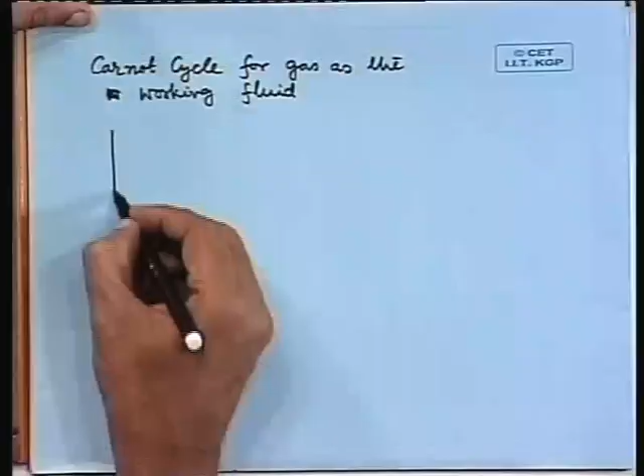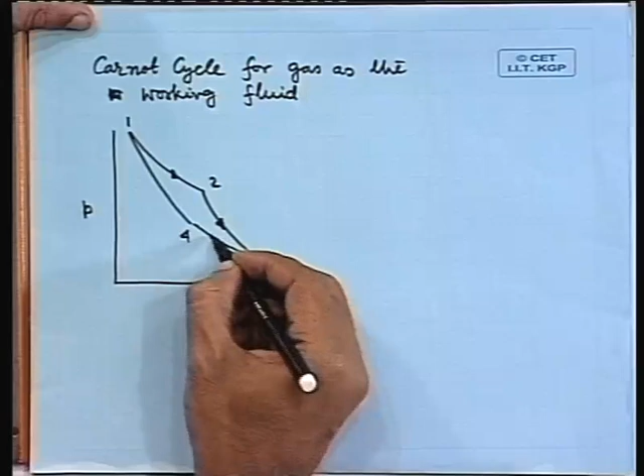So we will have this, the PV diagram of a Carnot cycle. One, two, three, four. A cycle like this: isothermal, adiabatic, isothermal, adiabatic.

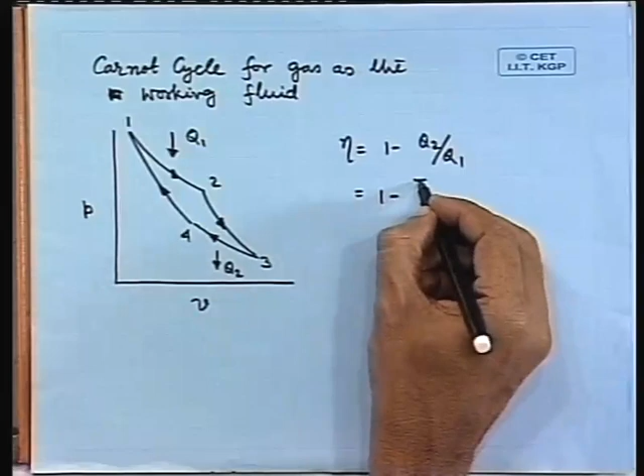Here we have got Q in, here we have got Q out, and out of the cycle we will have efficiency eta is equal to 1 minus Q2 by Q1. So this will be 1 minus T2 by T1, and that is the maximum possible when these two temperatures T2 and T1 are specified. But the problem is that...

For gas as a working fluid, isothermal heat addition and isothermal heat rejection are almost impossible, unless we have a very large engine with a very large surface area and an infinitesimally slow process. One may try to approach isothermal heating and isothermal cooling, one will not get exactly, but one may approach it.

Again, for the adiabatic processes, we have to have fast processes. So what we are having is that for part of the cycle we are having a very slow process, we need lower surface area... higher surface area for better heat transfer, and for part of the process we need to have very low surface area and high speed. So it is difficult to design such a cycle, it is not practicable.

Another thing: the change in volume, total change in volume for the cycle is V3 minus V1. This is V3 and this is V1, so that is the total change in volume. If we think of it in terms of the engine, this is nothing but the swept volume. This swept volume becomes very large compared to...

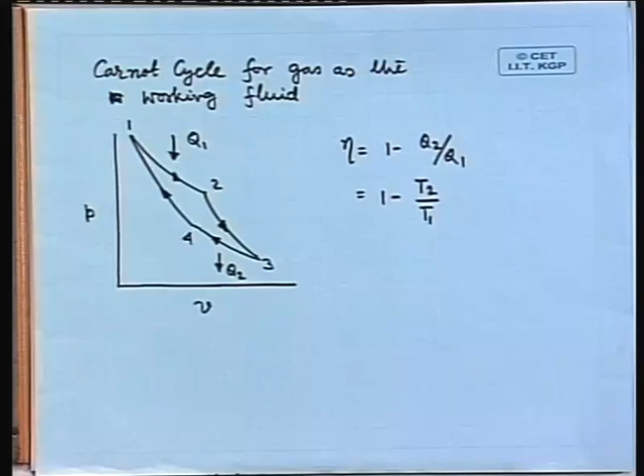the total work done. What does it mean? It means that the mean effective pressure, MEP, is very low for the Carnot cycle. So swept volume large means very large engine, very large volume, but we are having a very small amount of work output, so our MEP becomes very small. Now this is only representative of the ideal process.

In actual case, what will happen? There will be friction. So when we are having a low MEP without considering friction, when we consider friction, we will get very minimum output out of the cycle. So cycle design is not possible, not practicable. Even if somebody designs the cycle, friction etc. cannot be eliminated, and we will get very low output from the cycle. So though thermodynamically the efficiency is very high, practically the efficiency will be low, and practically this cycle we cannot develop either. That is why, with gas as the working fluid, one cannot have a Carnot cycle designed.

So one has to look for other types of thermodynamic cycles. Now we know that internal combustion engines are very versatile equipment, very useful equipment, and in those equipment the combustion takes place inside the engine itself, and the hot products of combustion push the piston, and we can get work output out of it. So let us have some small idea regarding the working of internal combustion engine.

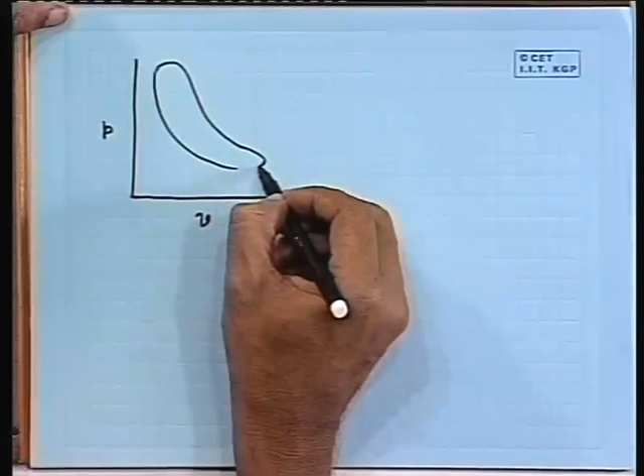If we see the PV process of internal combustion engine, an actual internal combustion engine will be something like this. This is PA, or atmospheric pressure.

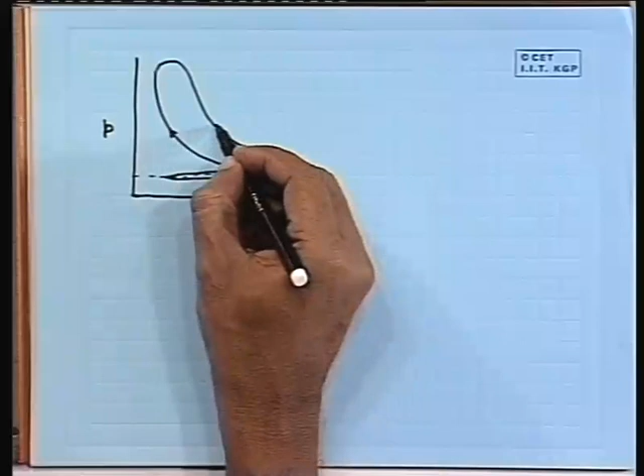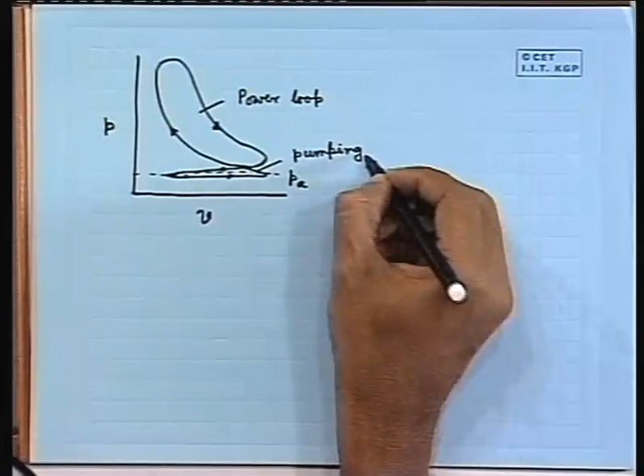So there are basically two loops: one is called the power loop and another is called the pumping loop. So one can explain the process in terms of...

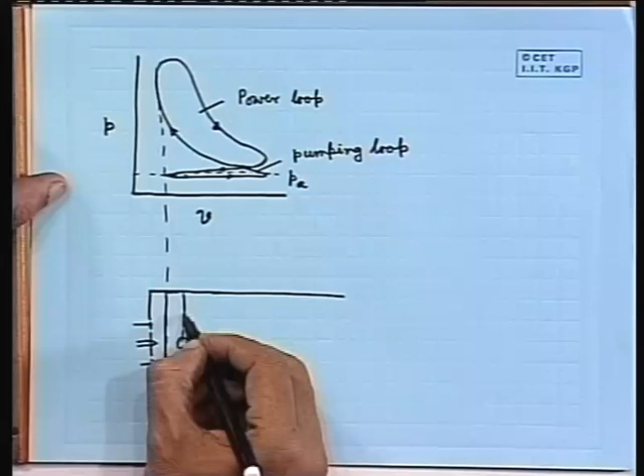So basically what I have shown is the piston-cylinder arrangement. This is the cylinder, this is the piston, and these two are the two extreme positions of the piston. This is called the outer dead center of the piston, and this is the inner dead center of the piston. So the piston has a reciprocating motion between these two dead centers, the inner dead center and the outer dead center.

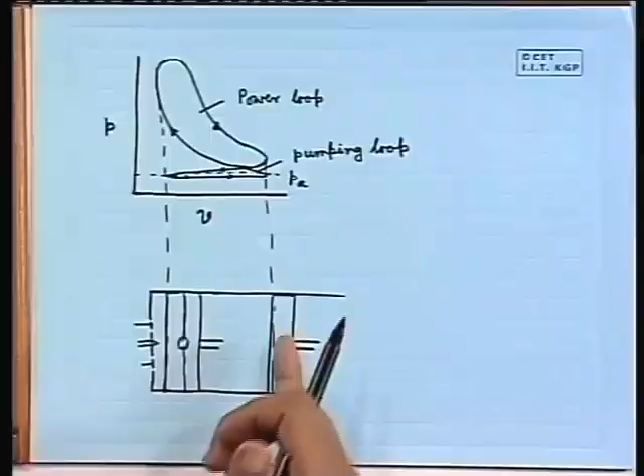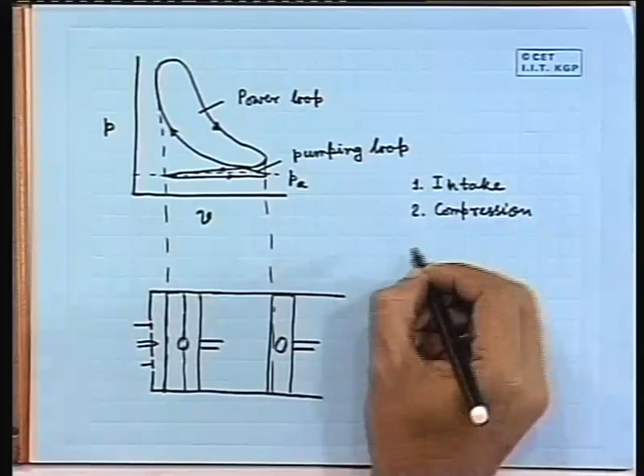Now basically there are four processes. If we consider, of course there are two types of machines, but if we consider the general working process, then there are four processes. So the four processes will be: intake, then compression, then expansion, and then exhaust.

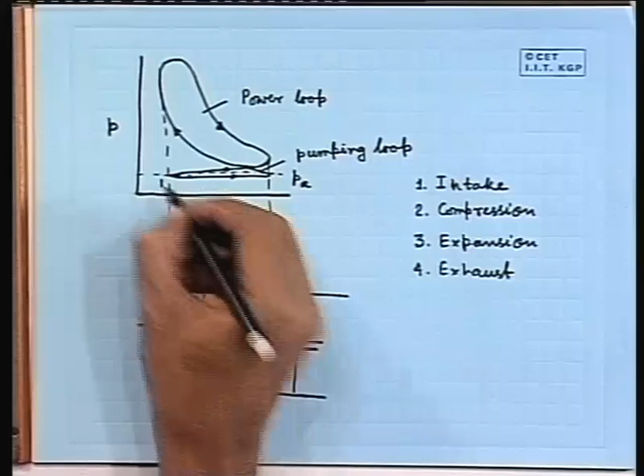So these are the 4 processes which we will have. Basically, if we see the 4 processes in this PV diagram, one can have 1 to 2, then 2 to 3, then 3 to 4, and exhaust 4 to 1.

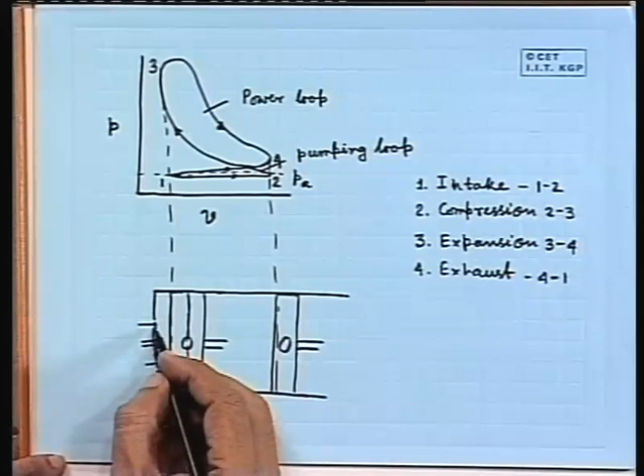So in the intake process, what happens? In this piston cylinder arrangement, there are 2 valves. One of them is the inlet valve and another is the exhaust valve.

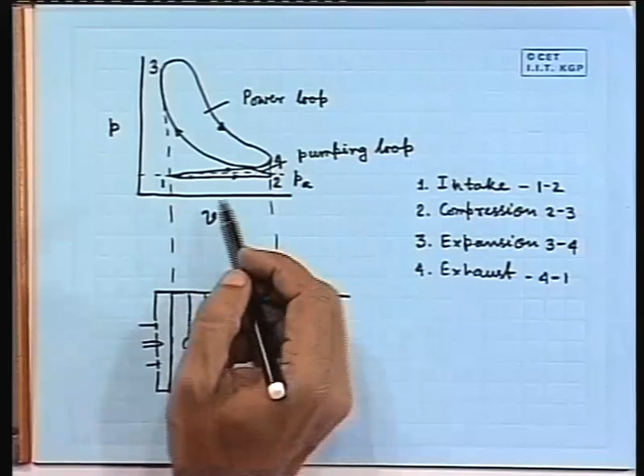So in the intake process, what happens? The piston moves from the inner dead center towards the outer dead center, reducing the pressure inside. The pressure falls below the atmospheric pressure, shown here. So during process 1 to 2, the pressure falls below atmospheric pressure, and air, or air fuel mixture, is sucked in inside the engine cylinder.

Then both the inlet valve and exhaust valve are closed. The piston has an inward movement from outer dead center to inner dead center. At that time, either the sucked air or the sucked air fuel mixture is compressed. That is the compression process.

Towards the end of the compression process, if we have sucked air fuel vapor mixture, then an ignition is created with the help of a spark plug, symbolically shown here. Or towards the end of compression of air, we inject fuel, liquid fuel, in the form of fine spray, so that the fuel air mixture gets further compressed and evaporated and ignition takes place.

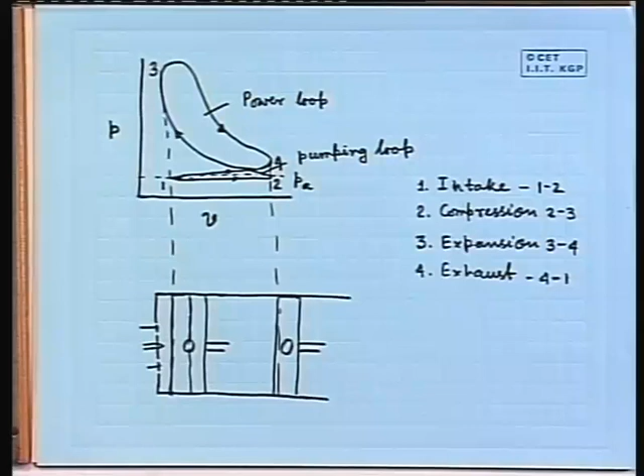So this gas has to be expelled out of the engine so that fresh charge can be taken again and the cycle can restart. The piston moves from outer dead center to inner dead center while the exhaust valve is open, so the gas pressure rises above atmospheric pressure and the spent gas goes out of the engine.

So this is what we have in a nutshell in an internal combustion engine. Now the process is complex. So we generally, when we do the thermodynamic analysis, do a certain amount of idealization. The idealized cycle, we call it—

Air standard cycle. The idealized cycle is called the air standard cycle. I can represent any air standard cycle here. It is assumed that both the suction and exhaust processes, or intake and exhaust, take place at atmospheric pressure.

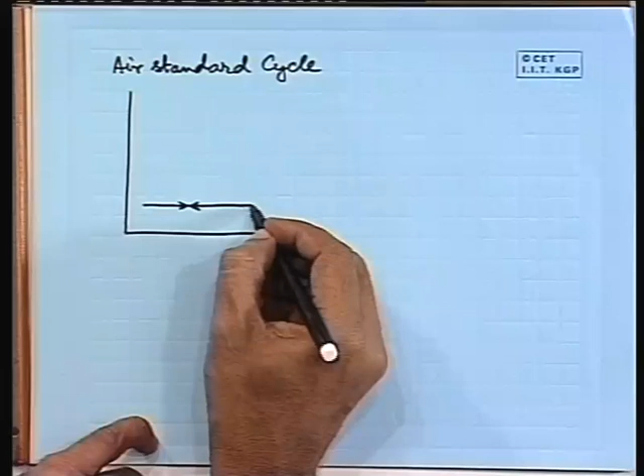So instead of this loop, we will have a straight line. Instead of this loop, we will have this straight line. So it is pointless to carry this thing along with the cycle diagram, so we can do away with this straight line also. Let us say this is one representation of an ideal cycle.

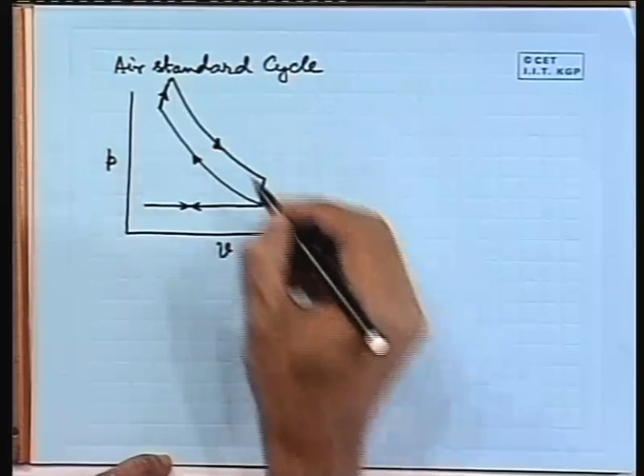Abolition of the suction and exhaust process is one attribute of the air standard cycle. Then we assume that air, and only air, is the working substance inside, meaning it does not change its chemical property or chemical composition during the process.

So the combustion process which takes place inside the engine is replaced by some sort of reversible heat addition process, in which heat is added from some external agency. And again, we have got some sort of a reversible heat rejection process.

Moreover, one assumes that the specific heats remain constant during the process, there is no change of specific heat. Actually, though there will be a large amount of change of pressure and temperature, we assume that the specific heat does not change.

So, this is what is the air standard cycle, because we want to first idealize the cycle and then we can see what is the performance of the idealized cycle vis-a-vis the actual cycle. So one can have the air standard cycle instead of the actual cycle for the thermodynamic analysis.

Now, we know that basically internal combustion engines are of two types, SI engine and CI engine. For SI engine or for petrol engine, the idealized cycle is known as the air standard Otto cycle.

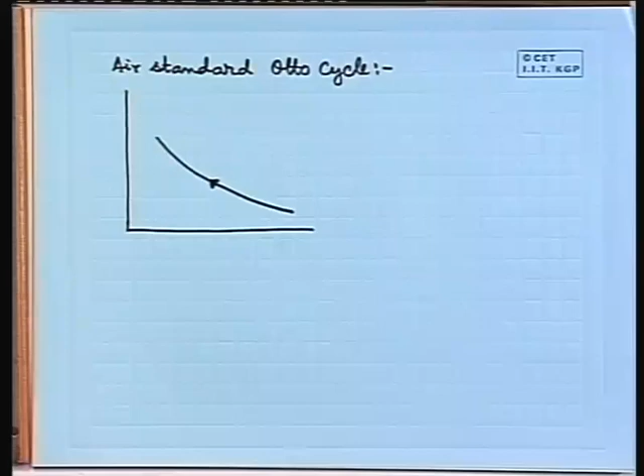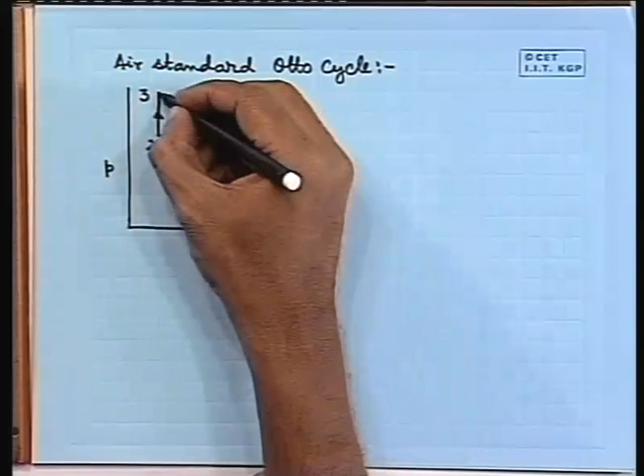Air standard Otto cycle. In the air standard Otto cycle, we will have adiabatic compression of air from 1 to 2, then, this is actually V and this is P, constant volume heat addition from 2 to 3, then adiabatic expansion from 3 to 4, and then constant volume heat rejection from 4 to 1.

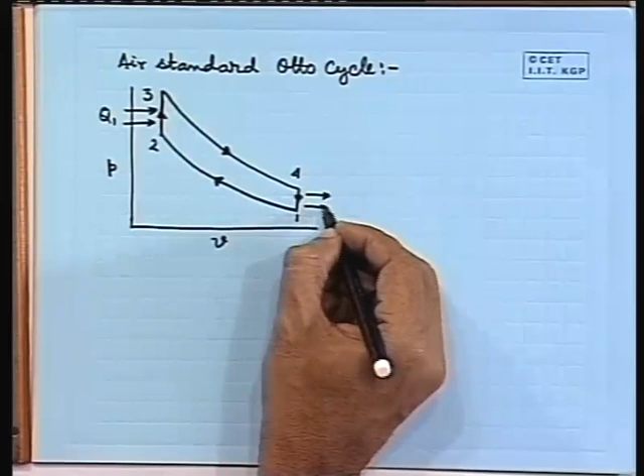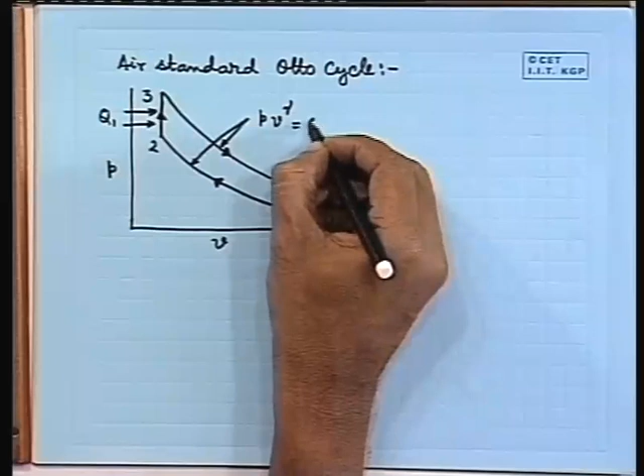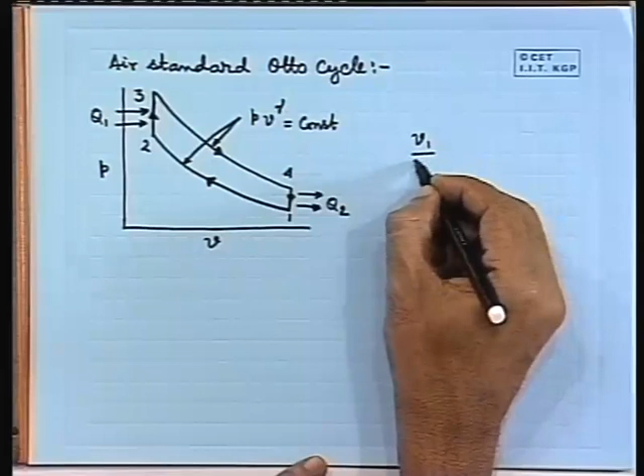These two are adiabatic processes, PV to the power gamma is equal to constant. So we will have this, and there is one important parameter, compression ratio. So we will have V1 by V2, that is the compression ratio.

What one can relate this thing to is the engine parameters. V1 is the volume inside the cylinder and V2 is the clearance volume. So by this one will get the compression ratio, and I like to represent it with R. R is the compression ratio.

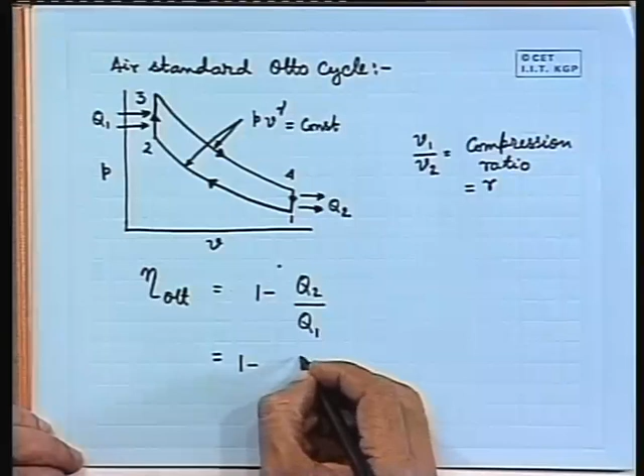Then efficiency Otto is equal to, what one can write is, 1 minus Q2 by Q1. So one can write 1 minus CV(T4 minus T1) divided by CV(T3 minus T2). So this is what we can write.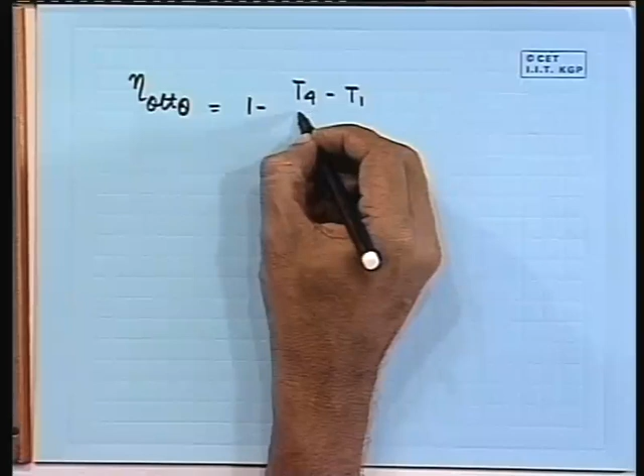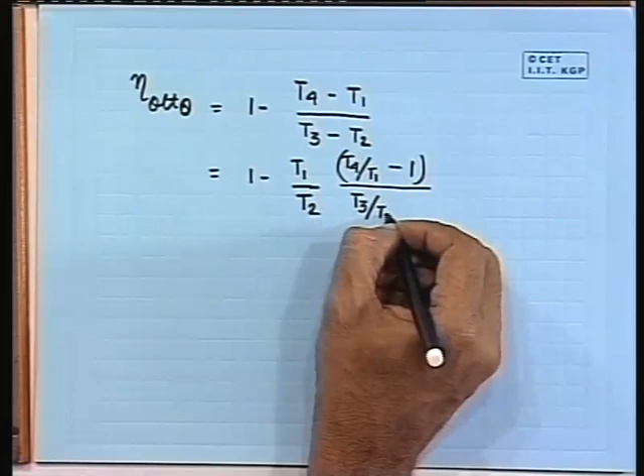So basically eta Otto is equal to 1 minus (T4 minus T1) divided by (T3 minus T2). So one can write 1 minus, well, T1 by T2. Here one can write (T4 by T1 minus 1) and (T3 by T2 minus 1). This is what we can write.

Now one has to find out the relationship between different temperatures. Actually, if we look into the cycle, there are 4 nodes: 1, 2, 3, 4, and the relationship between these 4 nodal points, 4 strategic points, is important, and that one can find out very easily. Actually, what one has to use is the ideal gas law, because we are analyzing the air standard cycle where air is assumed to be an ideal gas.

So one can use PV is equal to RT. So that relationship is there, PV is equal to RT, and then for 2 paths, that means PV to the power gamma is equal to constant for 1,2 and 3,4. These two paths, PV to the power gamma is equal to constant. So these two conditions we can use and we can determine the relationship between different temperatures.

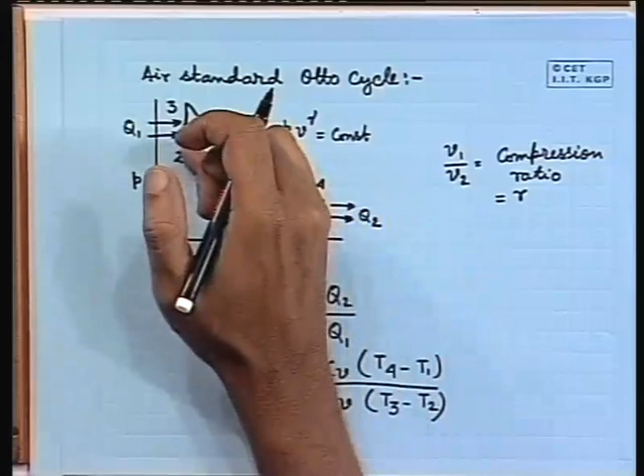All right, so now what one can write is T2 by T1. Basically one can start from this point, basically one can start from point 1. Why? Because here this is the intake point and generally this point is taken equal to the atmospheric condition. All right, so one can start from here and one can move along the cycle. So T2 by T1 is equal to (V1 by V2) to the power gamma minus 1.

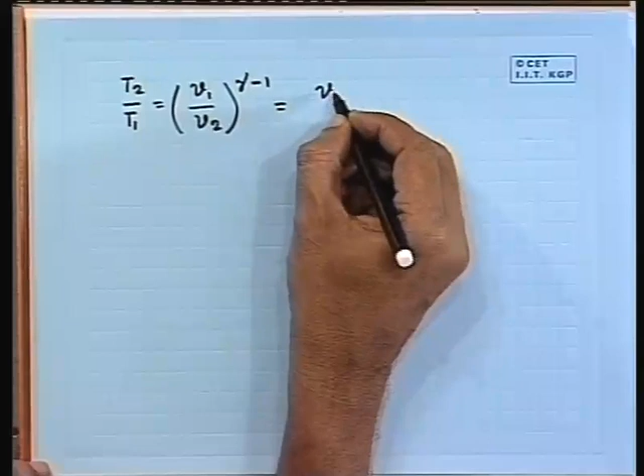So it is equal to (V4 by V3) to the power gamma minus 1. So it is equal to T3 by T4, is equal to R to the power gamma minus 1. V1 by V2 I have defined as compression ratio or R. So what we get is: T2 by T1 is equal to T3 by T4, or T4 by T1 is equal to T3 by T2.

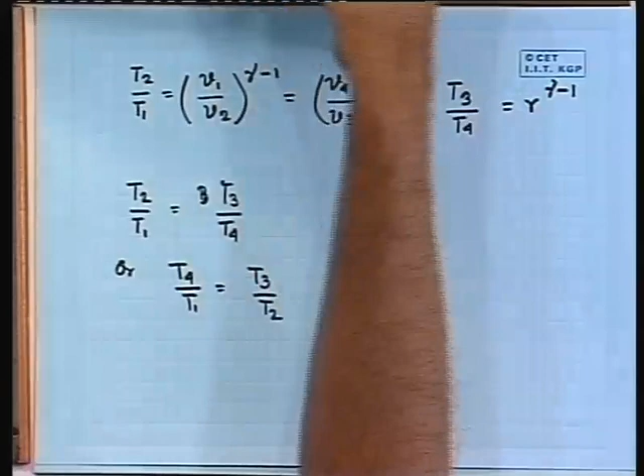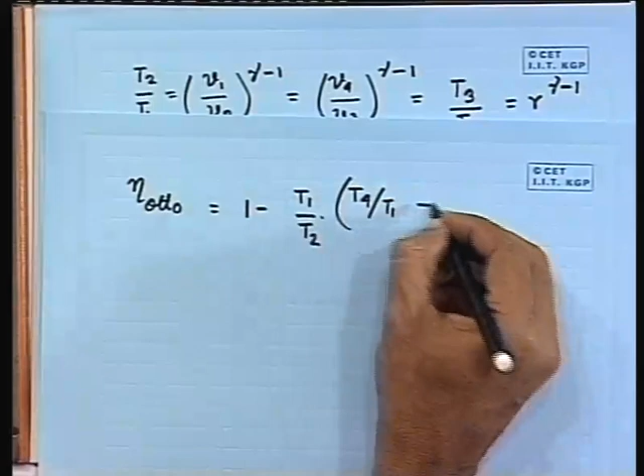So now I will write down, forget about it, I will start from this point. Let us say eta Otto is equal to 1 minus [T1 by T2 into (T4 by T1 minus 1)] divided by (T3 by T2 minus 1). So these two quantities are same, so it can be cancelled, and then one can write it is 1 minus 1 by R to the power gamma minus 1.

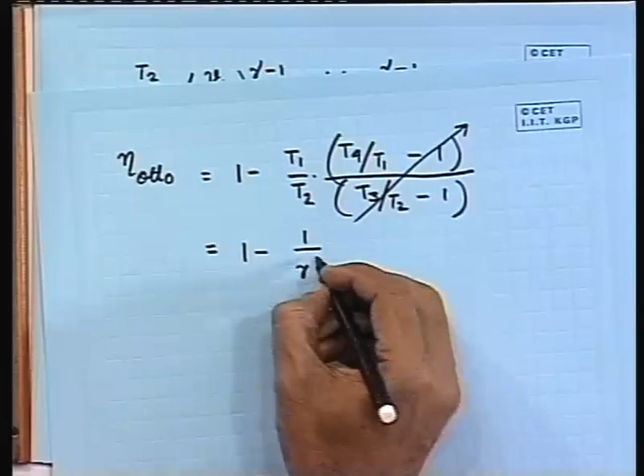So this is what we can get from our thermodynamic analysis of the cycle, and R is the compression ratio. R is the compression ratio. All right, so for ideal analysis of the ideal cycle, one can take gamma to be 1.4. In other cases, one can take different values of gamma, but for the ideal cycle, one can take gamma equal to 1.4.

What one can see is that the efficiency of the Otto cycle can be increased by increasing R. Gamma we do not have much control over, it is a property of the gas or the working fluid, and for the working fluid we do not have infinite independence in selecting a working fluid. But R, probably we can do something, we can select higher values of compression ratio.

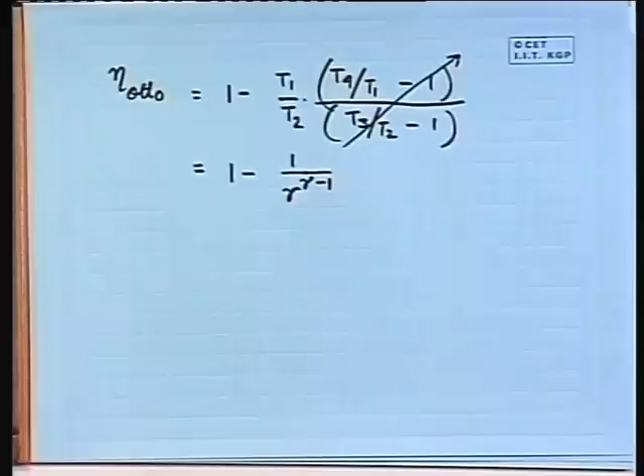Now, the problem with selecting higher values of compression ratio with the conventional design and conventional fuel of the internal combustion engine is that before you produce the spark, auto ignition will take place. It will ignite automatically before you produce the spark, and that gives uncontrolled combustion, which is not desirable. So that is why we have a limitation on the value of R, and for petrol engine or SI engine the compression ratio is generally small compared to its counterpart, the diesel engine. So we will have a lower value of compression ratio.

Now we go for the other type of arrangement. The Otto cycle is suitable for SI engine, spark ignition engine, where when the air is being sucked in, the fuel is sprayed into the airstream. That means before the air comes into the engine, with the help of a carburetor, the fuel evaporates in the airstream. So a fuel vapor mixture is formed, and that mixture then enters the engine. So that is one way of having the internal combustion engine.

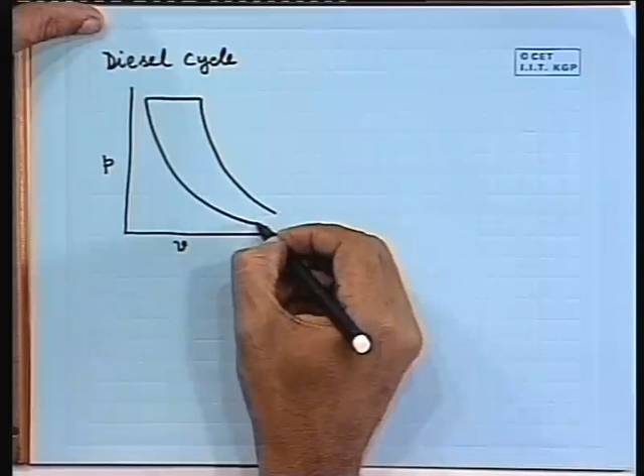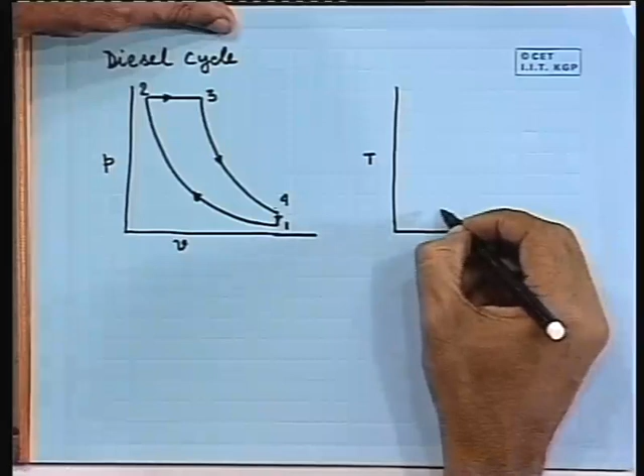The PV diagram of the diesel cycle will be something like this. This is the PV diagram of the diesel cycle. We can have side by side the TS diagram also. So 1 to 2 is the adiabatic process, 2 to 3 there will be rise in temperature, 3 is the highest point, and like this 1, 2, 3, 4.

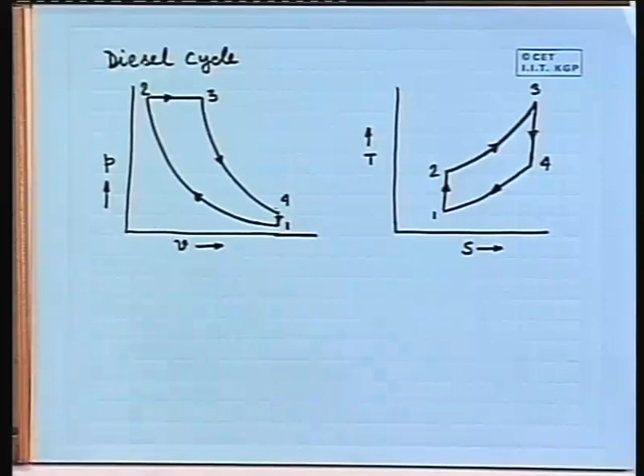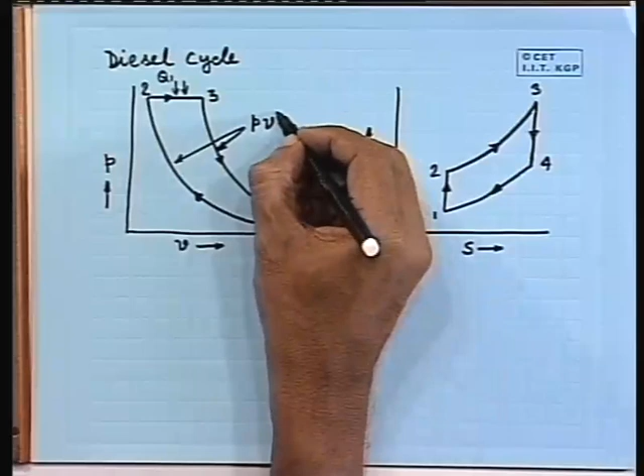So this is Q1, this is Q2, and well, these two are PV to the power gamma equal to constant.

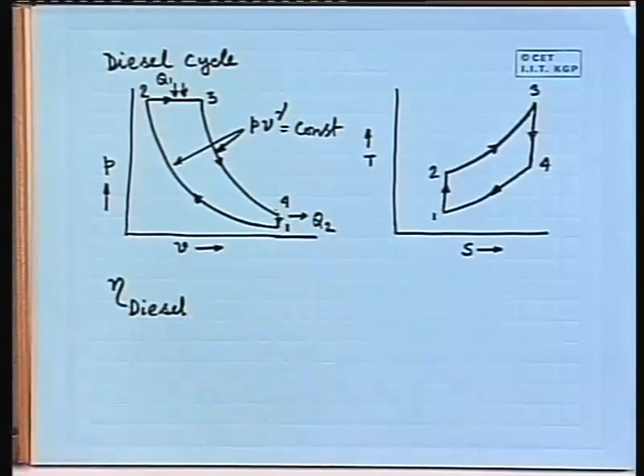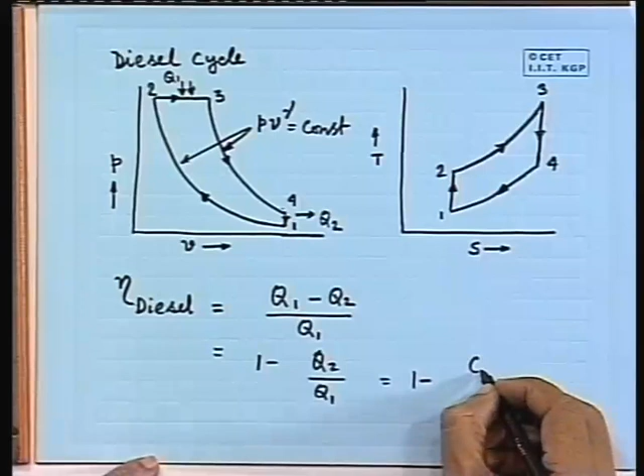So the efficiency of diesel cycle, that will be Q1 minus Q2 divided by Q1, work done divided by the energy supplied. So this will be how much? This will be 1 minus Q2 by Q1. So this is 1 minus Q2, that is the constant volume heat rejection process, Cv times T4 minus T1, divided by Cp, constant pressure heat addition, T3 minus T2.

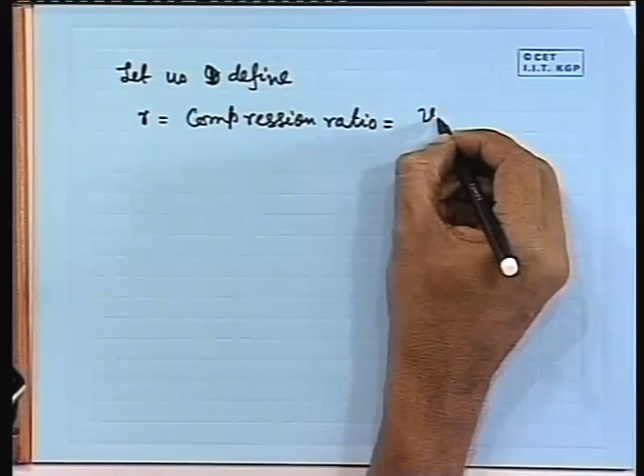At this point we want to define a few quantities. Let us define R as compression ratio, equal to V1 by V2. Where V1 is the total volume of the engine and V2 is the clearance volume. Already we have seen this in Otto cycle, it is the same quantity.

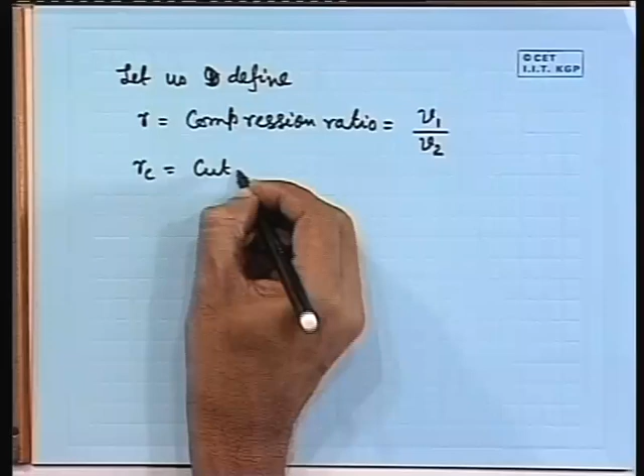And then we have got cutoff ratio, Rc, that is cutoff ratio, we call it V3 by V2. Physically it means that at point 3 the fuel supply is cut off. We start supplying the fuel at point 2, and at point 3 the fuel supply is cut off. So this is your cutoff ratio.

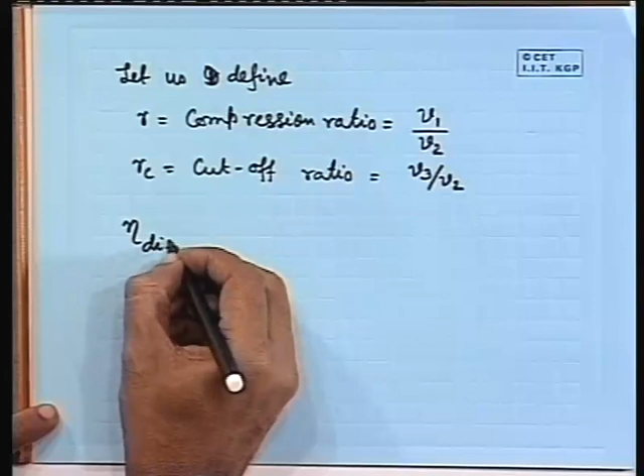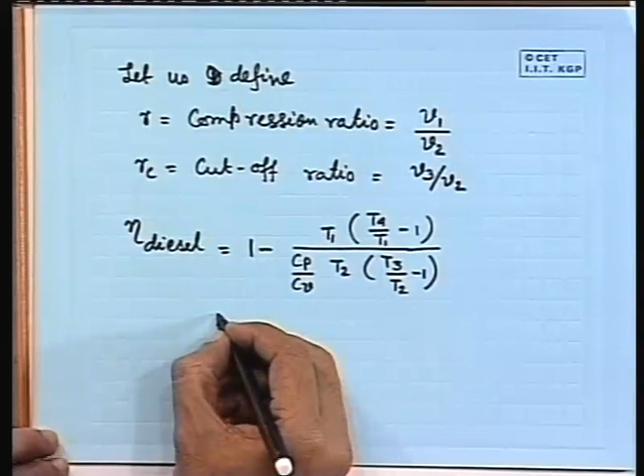Now, I will not go into detail derivation. Basically what one has to do here is get the relationship between different temperatures. I can do it slightly ahead and then leave it to you. Eta diesel, that is 1 minus Cp by Cv, one can write, and then one can have T1 here, then T4 by T1 minus 1, and one can have T2 here, then T3 by T2 minus 1. So basically we have 1 minus 1 by gamma into T1 by T2 into T4 by T1 minus 1 and T3 by T2 minus 1.

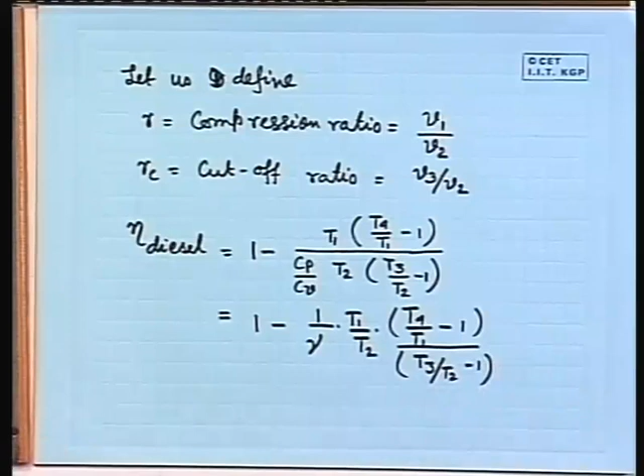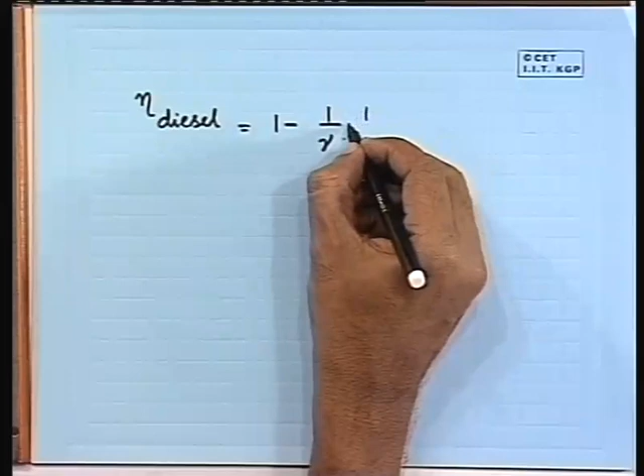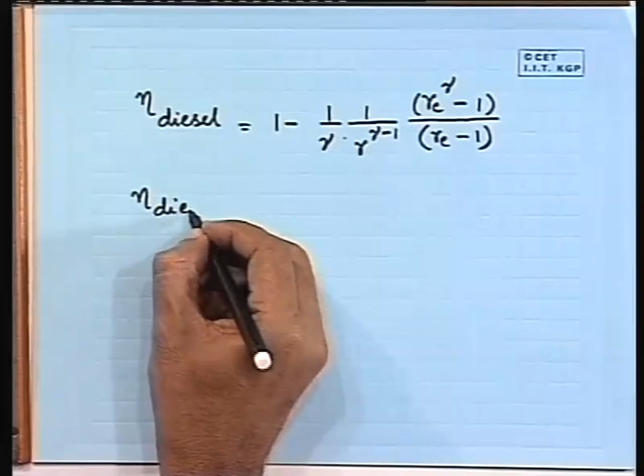Well, now just by the method we have followed earlier, one can do the analysis, and if we do the analysis, we will have a much cleaner expression. Eta diesel will be 1 minus 1 by gamma times, 1 by r to the power gamma minus 1, then on top rc to the power gamma minus 1, you will get this, and here you will have rc minus 1. So this will be the formula. So basically again, eta diesel will be a function of gamma, then r and rc.

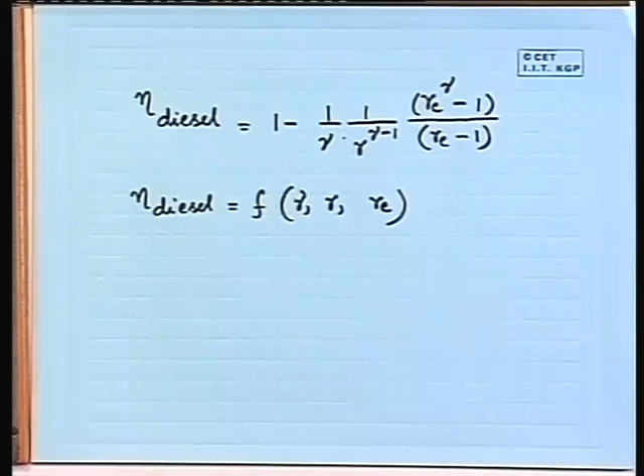Well, here of course we do not have much restriction on r, we can increase r. In fact, in CI engines we have high compression ratio. Only problem is, the more the compression ratio, the more bulky the engine becomes. Engine weight will become larger and larger to withstand the pressure fluctuation. One side we have low pressure, almost near atmospheric, and other side we have much higher pressure. So the engine will be bulkier. Again there are practical limits, so we cannot go beyond a certain value of R.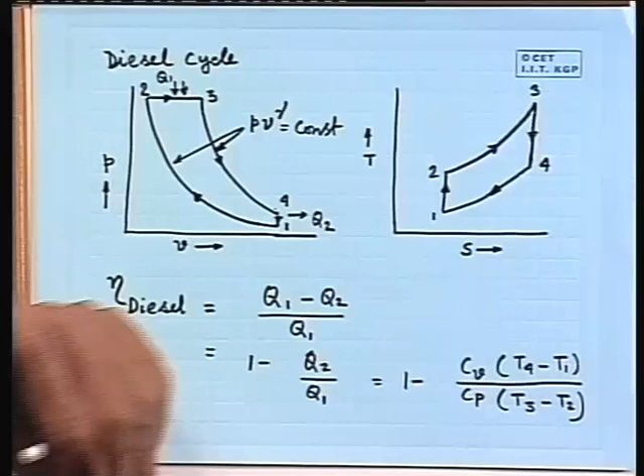RC also one should restrict. Let us say this is the engine cycle diagram. If we have lower RC, then enough amount of fuel cannot be injected. If you have higher RC, then we are not getting a large amount of work due to the expansion. So one has to compromise between these two.

So the diesel cycle, or diesel engine, will have the efficiency in terms of these quantities.

We have idealized the combustion process by two different reversible processes. First, we thought the combustion process can be represented by a constant volume heat addition process. Next, we idealized that combustion can be represented as a constant pressure heat addition process. In fact, the combustion process is so complex that it cannot be idealized either by constant volume or constant pressure process alone. What has been seen is that at the initial stage of combustion there is a very quick increase in pressure while volume remains almost constant, and after that pressure remains more or less constant while volume increases. So people thought a better representation would combine both constant volume and constant pressure processes. This cycle is known as the mixed pressure cycle or dual cycle.

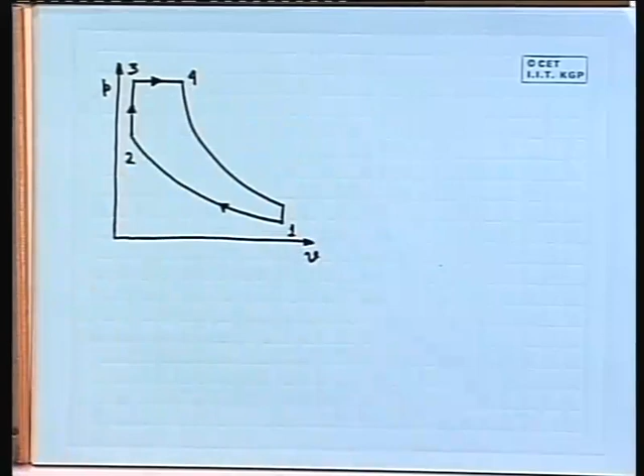So dual combustion cycle, or mixed combustion cycle, or mixed pressure cycle — there are different names for the cycle I am going to describe. Ideally the cycle looks something like this, on a pressure-volume diagram. We start from state 1. So 1 to 2 is the compression process, 2 to 3 is constant volume heat addition, 3 to 4 is constant pressure heat addition, 4 to 5 is adiabatic expansion, and 5 to 1 is the heat rejection process which takes place at constant volume.

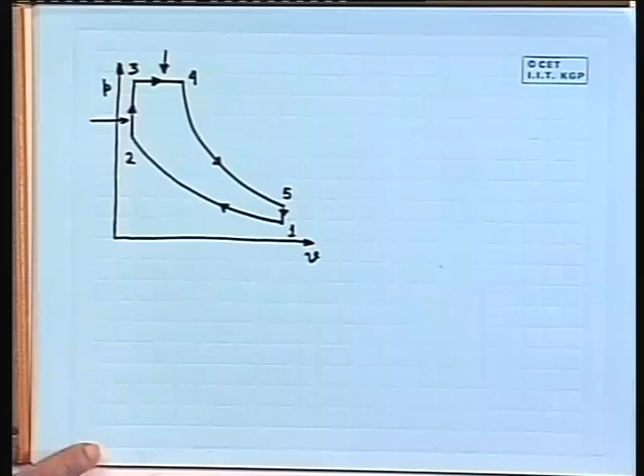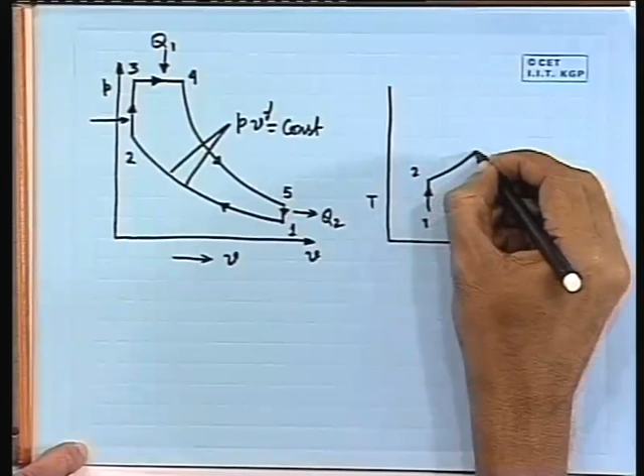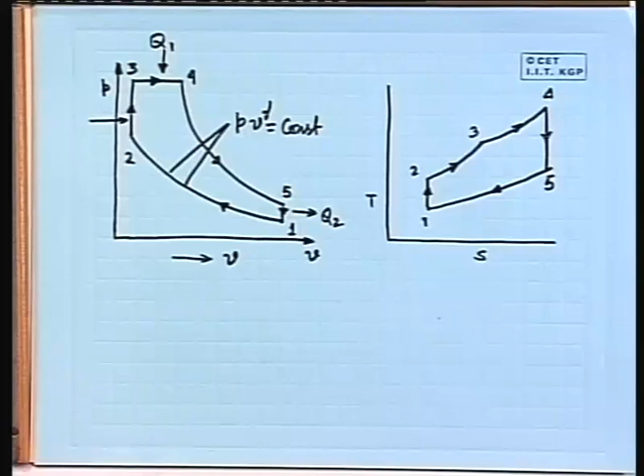So through these two processes we have heat addition, Q1 and Q2, and these other two are adiabatic processes. We can also show this on a T-S diagram. This represents a constant entropy process, that is, reversible adiabatic process: 1 to 2. Then 2 to 3 is a constant volume process, 3 to 4 is a constant pressure process, 4 to 5 is an adiabatic process, and 5 to 1 is a constant volume heat rejection process. So this is how we get the cycle.

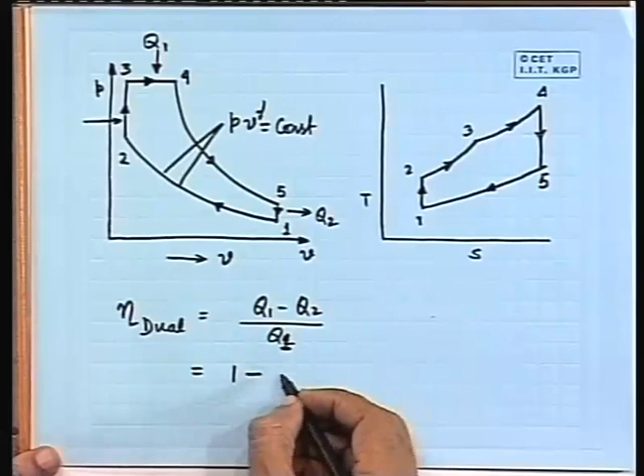Now the efficiency of the dual combustion cycle, or mixed combustion cycle, will be Q1 minus Q2 divided by Q1, the heat addition, which gives 1 minus Q2 by Q1. So let us start: eta dual equals 1 minus the constant volume heat rejection term, Cv times T5 minus T1.

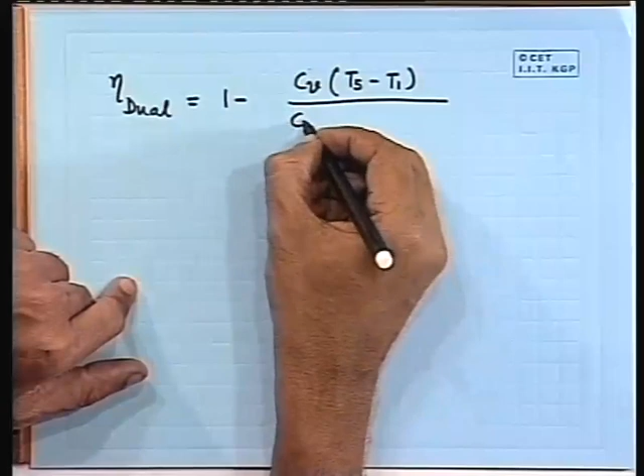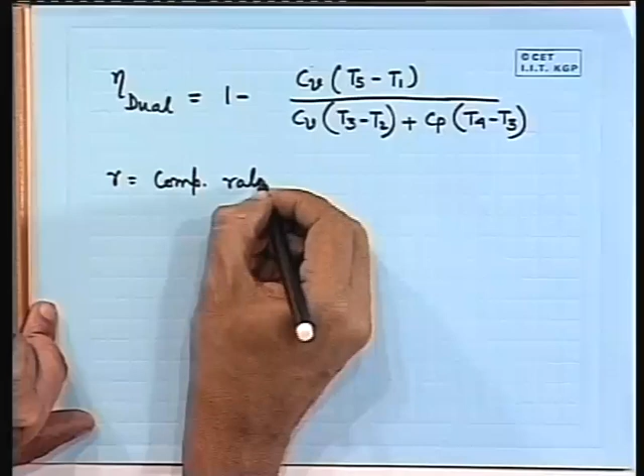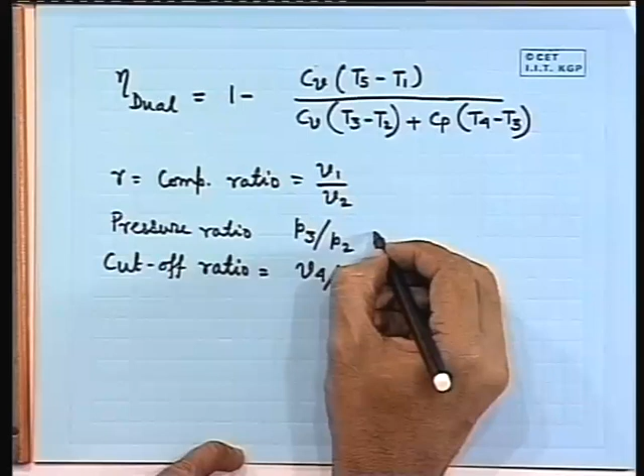There are two heat addition processes, so this will be Cv times T3 minus T2, plus Cp times T4 minus T3. At this point let us define R, the compression ratio, as V1 by V2. Then we have the pressure ratio, Rp, equal to P3 by P2, and the cutoff ratio, Rc, equal to V4 by V3, which is the same as V4 by V2.

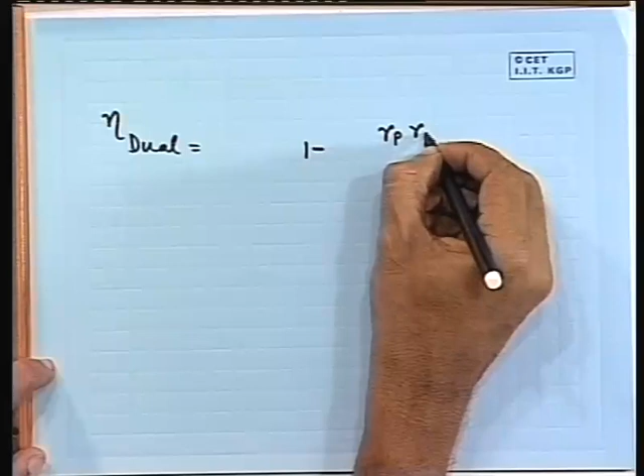If you introduce all these definitions, then you get eta dual equals 1 minus [Rp times Rc to the power gamma, minus 1] divided by [(Rp minus 1) plus gamma times Rp times (Rc minus 1)], all divided by R to the power gamma minus 1.

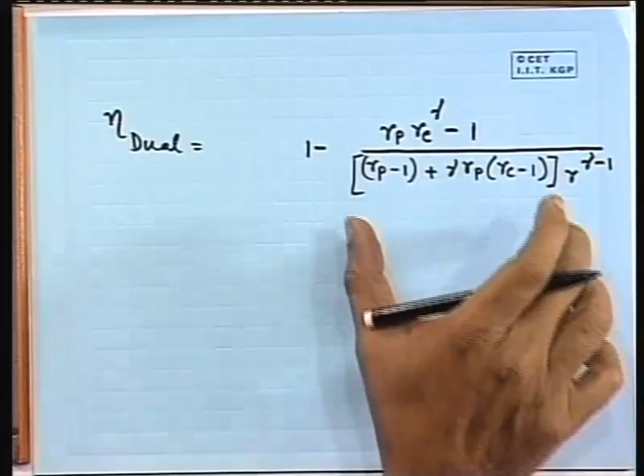This is the general expression. If we put Rp equal to 1, we get the expression for the diesel engine. If we put Rc equal to 1, we get the expression for the Otto cycle. So you can try these derivations — first derive this general equation, and then try these special cases.

All right, so I think we will stop here and continue from this point in our next class.